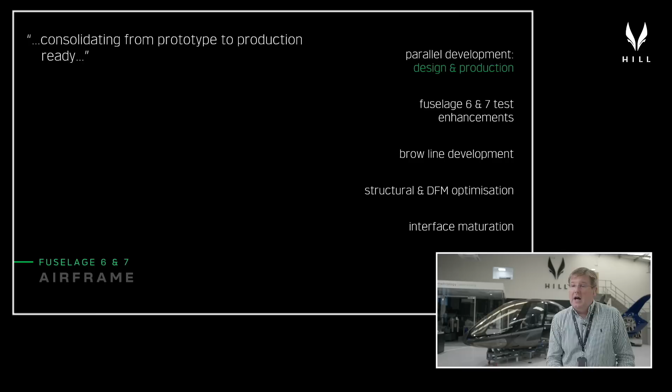Thanks, Ruben. Thanks, Misha, and welcome, ladies and gentlemen, back to DC1 for another packed update on where we are with the development of HX50. As usual, this evening, the presentation will take the form of a bit of a walk around where we are on the airframe. I'll update you on the engine and the drivetrain. We'll talk about the avionics. I'll add some more stuff on our electrical system development and our power electronics this evening, and we'll finish up with an update of what's going on around this factory here and where we are with our scale up to full-scale production. Let's start with the development of the airframe.

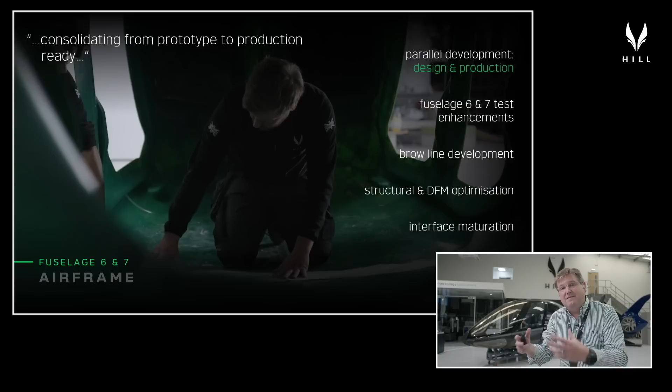So we're currently building fuselage 6 and fuselage 7. Now, one of the benefits of our vertically integrated strategy is that we're developing in parallel all of the production methods and processes at the same time as we're developing the design and the aircraft itself. And what that means is we get the opportunity to bake in a lot of the things that get fed back from production, fed back from tests that we carry out on early production specimens into the design before we freeze the production tooling. And that's exactly what we're doing with fuselage 6 and 7.

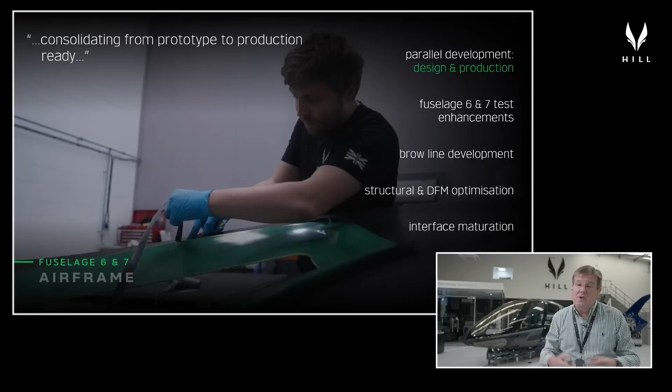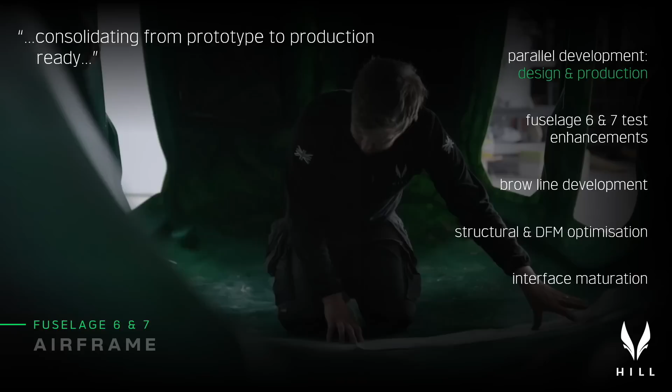So one of the major areas that we've enhanced with the fuselage is during the human factors testing, we noticed that we'd got a slight limitation in the upward view angle of the fuselage, and we were able to modify that. We've subsequently gone back, modified the tooling, and we're currently grafting in a modified brow line into the two fuselages that will follow. We're also being able to test out a range of modified production processes for the fuselage that reduce the amount of labor, increase the amount of parallel activities that we can do as we produce these fuselages by working on open tools as long as we possibly can before we bring the whole thing together to produce the structural monocoque that you've all got used to seeing.

There are some other areas that we're able to bake in as well. As you can imagine, the fuselage is the stickle brick that absolutely everything else attaches to in the aircraft. So as all of these other areas are maturing and their interfaces mature, we're able to capture that and bake that into the production tooling rather than having to compromise on things that were frozen in very early in the design process. So all of those things are going on right now. Fuselage 6 itself, the outer skin of that is now built.

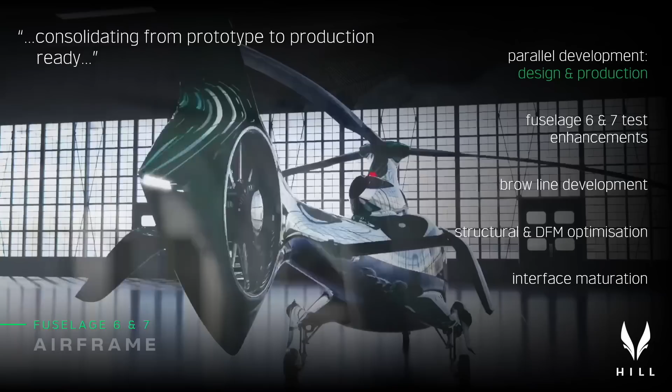All of the foam cores are wrapped, and over the course of the next week we expect to complete the primary shell for fuselage 6. Over the remainder of the month we'll be grafting in the new brow line and making a few modifications to how the undercarriage fits, ready to accept wheels on that one, and then number 7 will be set up for skids for the December event. Really pleased with how all of that's coming on.

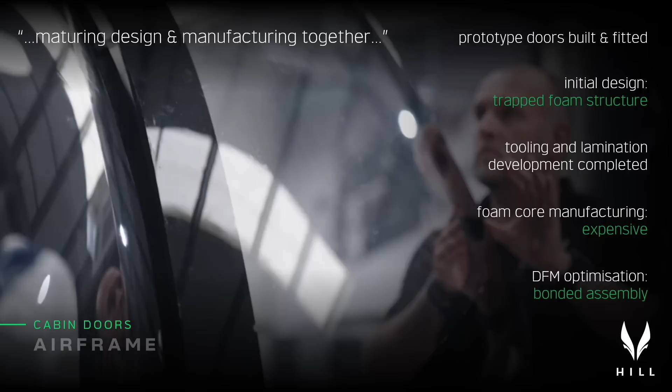Some of the other areas we've been working on are the development of the general fit and finish, so we've done an awful lot of work on the cabin doors. Doors are far more complicated than you might expect when trying to graft flush-fitting doors onto a fuselage that is essentially curved in every direction. Adjusting the doors on the job is much more complicated than the planar doors you get on road vehicles, and it's also an opportunity to take a look at how we initially designed the doors.

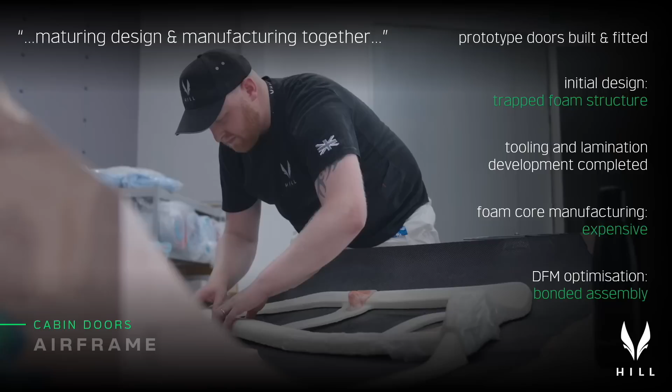They were initially designed as trapped foam core structures, and we're now looking at an A surface and a tooled B surface construction that allows us to trap a lot of the internal features within the door. This also allows us to work on both the A surface and the B surface in parallel in production, and both of those parts now get tooled surfaces, so it makes it much easier to produce doors to much tighter tolerances.

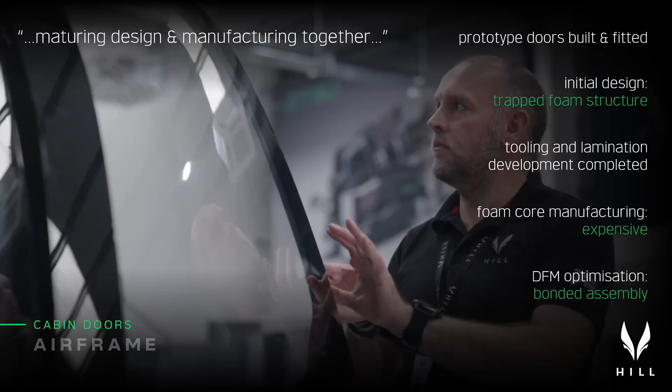That makes fitting it on the finished airframes a lot easier to do. All of the tooling approaches for the doors have now been tested, and the laminating processes have been developed and tested. We looked extensively at different ways of manufacturing the foam cores before deciding that a better way of doing the doors would be to tool both sides and do them in parts.

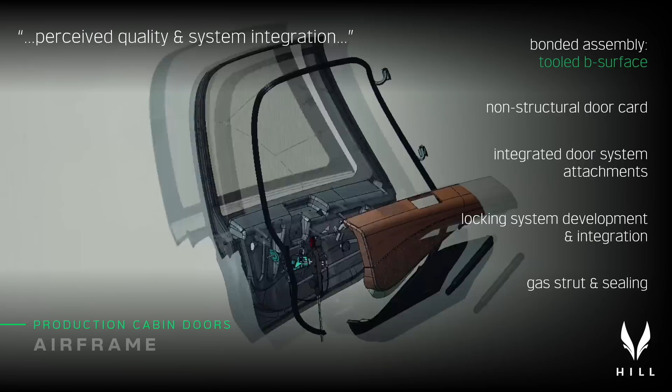All of that work has been going on over the course of the last month, and the guys are currently working on the final production scheme for the doors that allows us to have the tooled A surface, the tooled B surface, and the integration of a non-structural door card that allows us to provide that automotive fit and finish to the inside of the interior.

We're developing out the locking system that gives us our elegant flush fitting handles on both the door card and the outside of the door. We've done a variety of development activities on different sealing strategies for the airframe and for the doors, and we've also looked at packaging the gas struts so that we can hold the doors open.

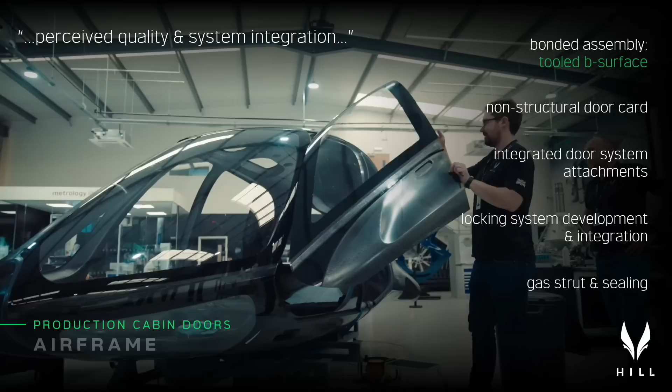When you look at the doors that I'll show you on the airframe shortly, one of the challenges on HX50 is that because the A pillar is tilted so far back, the door opens out and up, so it very much needs a gas spring to hold that big door securely open when you're using it. So all of those things are coming together very, very nicely.

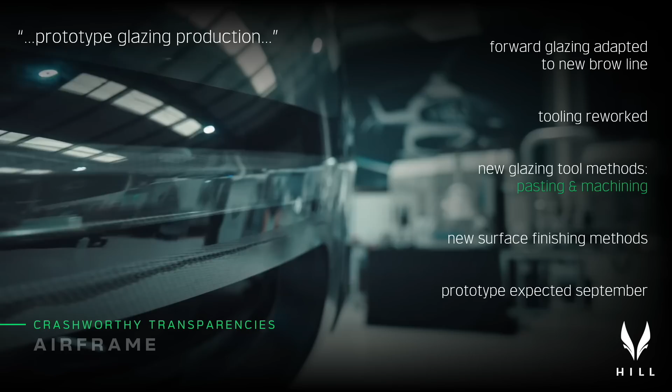With the modifications we've made to the brow line of the fuselage, that obviously passes on inferred modifications to the tooling we've developed to produce the glazing, certainly the upper glazing for the forward fuselage. I mentioned last month how the guys had been developing improved tooling strategies to produce optically perfect glazing in-house, both in acrylic and in polycarbonate, for the impact resistant windows on the front of the aircraft.

We're currently reworking those tools as we speak to accept the new brow line and to upgrade the surface finish across the full suite of glazing panels we've got on the aircraft. So all of those things have been going on during the course of the month.

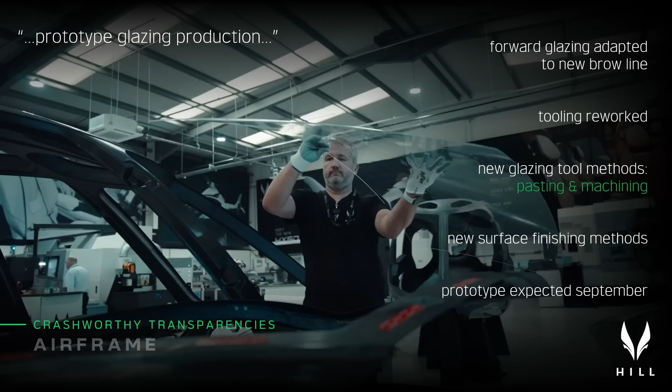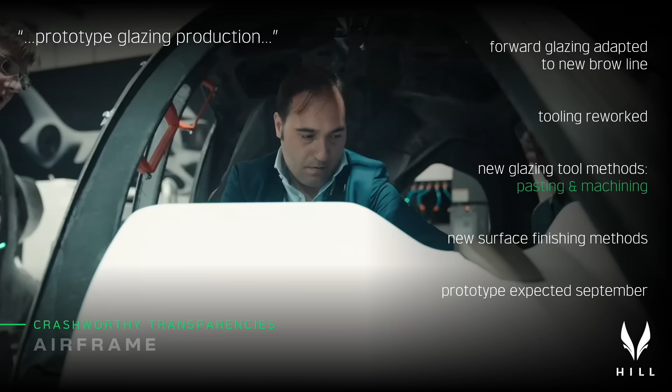The rework we're doing to the existing prototype tools simply involves using some of the same pasting technology we use for producing the big fuselage patterns to allow us to rework those, and then the latest surface preparation methods in terms of getting that ultra high gloss optical finish we need to deliver optically perfect windows. So all of those things have been progressing nicely over the course of the last month.

We've had a small interruption with the 5-axis machine having a small issue, but that's due to be resolved early next week, and then we should be back up and running with the next set of tools. We're hoping that if we get the full suite of tools completed by the early part of September, within September we should see the first full set of optically perfect glazing panels for HX50 that fit the new modified fuselage.

So really pleased with how that's been coming on. One of the key areas that we're trying to push forward in general aviation with HX50 is this idea that HX50 is essentially a flying supercar. It's an aerial grand tourer, and for that we need to deliver levels of perceived quality that traditionally have only been delivered in high-end automotive organizations.

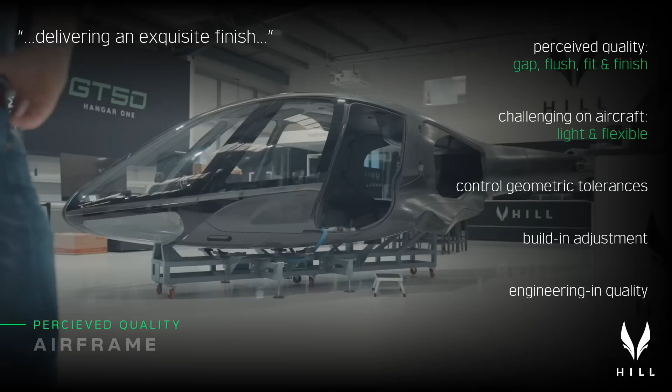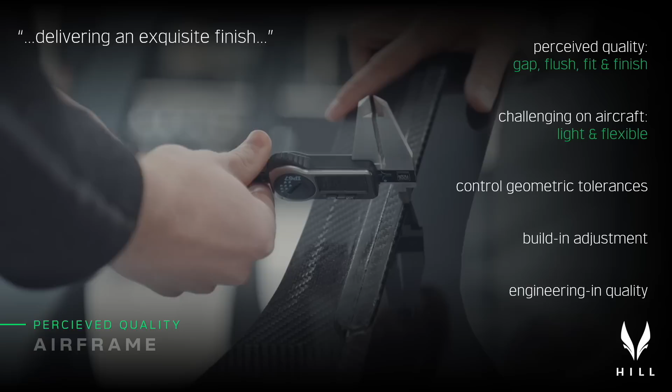Now, that's a very difficult thing to do in an aircraft, because fundamentally you're dealing with composite materials as your base structure, which are quite difficult to finish at the best of times. And then we're dealing with structures that have to be so light that they're inherently very flexible. So getting flexible doors to fit in a flexible fuselage and to maintain the kinds of gap and flush conditions that people have come to expect in premium cars is a very challenging activity.

So over the course of the last month, the guys have been working really hard to look at strategies that we can maximize the quality built into the airframe, ensure that the whole surface, the A surface, is delivered perfectly flush, perfectly streamlined, and that we have enough adjustability built into the airframe design that we're able to adjust doors to accommodate the inherent variation that you get in any series production part. So we're working very hard at the moment to engineer quality and perceived quality into the production processes to enable us to deliver these levels of production, perceived quality on every production unit.

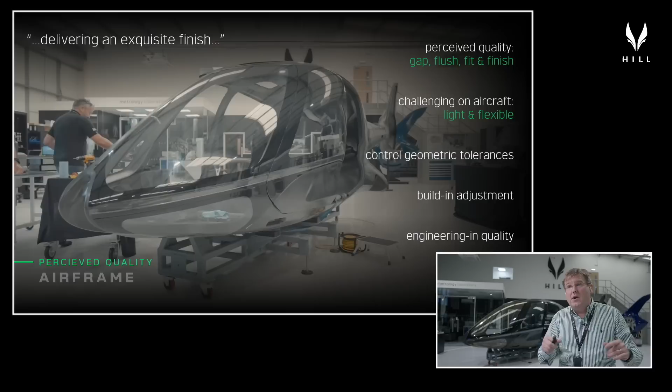So there's been a lot of work that might not be obvious as to why you need to do it, but there's lots of really important things going on in these early fuselages that we're baking into fuselage 6 and 7 to make sure that the production units live up to expectations when compared to modern premium cars and supercars. So let's go and have a look at the airframe behind me, and I'll show you some of the things that we've been up to.

So as you can imagine, I spend most of my life dealing with the minutiae of tiny little details, making hinges work, locks work, stress analysis work, getting production processes to work. And every once in a while, something happens out here on the shop floor, and it makes you realize, you know, we're getting there. This is really coming together.

And one of those moments was when we first got to put the first few glazed panels on, the first couple of doors on, and the physical property that we've got here on the shop floor really started to take shape. We've kind of got used to looking at it here on the shop floor now, but I think you'll all appreciate when you look at it, everything that we said we would deliver in terms of the images that we've provided, the look and feel and quality of the product is being delivered, even on these crude early production demonstrator prototypes that we're producing here.

So what we've got here then is the first prototype glazing installed, the first chin windows installed, and we've developed through the strategy for managing all of the panel gaps with the doors, all of the panel gaps with the glazing. We've talked in some of the previous updates about the need to have these blackout obscuration bands around the glazing, and those things are there purely because we bond the windows onto the carbon flanges, and so we need to obscure the adhesive behind there to protect the external aesthetic of the aircraft.

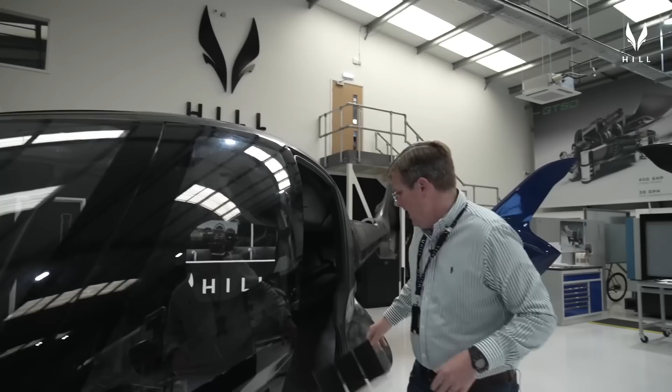So these preliminary bands we've just done with a hard edge, just because it's easy for us to do that manually. In production, we'll be adding the screen printing process that we showed you previously, and that adds this gradiated dot fade that you're used to seeing on your vehicles at home, just to ease from the harsh black into the transparent area of the screen. And again, it's these little sort of details that really add to the perception of quality that you deliver when you approach the aircraft.

One of the other challenges that we've been working with on the prototype aircraft is obviously the doors on aircraft are a lot shallower in section than they are on automotive vehicles, and when you have gaps between panels on cars, they usually back onto a huge shadow gap, so you can't see anything that's behind it. Because our structure sits right behind the doors, it's a much shallower section. We end up having to deal with all sorts of surface treatments and things in there just so that you can't see through to the nuts and bolts of the structure.

And it's little details like that that you have to get right to make sure when this is presented in full, it looks right. You'll also notice that we've got the groove underneath the glazing here that receives the chrome signature strip and also part of the signature lighting that goes with the aircraft. We've got the door handles for both external and internal, all in development at the moment. They're being produced as we speak.

The door itself, as I said, it opens slightly upwards because of the angle of the A-pillar, and so we have a gas spring installed from the root of the A-pillar up to the base of the door here, well out of the way of foot swing. Now, if you look at the interior of the door here, Milan, what you can see is this early prototype door was based on the original trapped foam construction. So we tool the outside, we put a foam core in, and we lay carbon fiber over the inside.

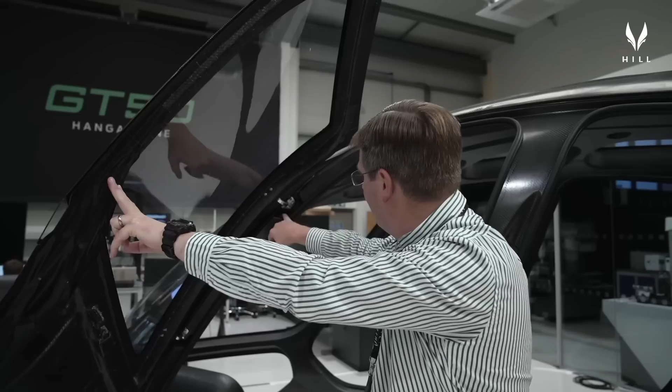The challenge with this construction, when you then want to trim the inside of the door, is this isn't an accurate surface. This isn't a tooled surface. So we then have all sorts of difficulty in accurately registering the trim panels that need to fit really accurately. And so the move to a tooled B surface on the back of the door makes all of that much, much easier. So those of you that have been looking at the airframe over the course of the last few months might have wondered what these recesses and pockets were. They're there to receive the pantographic hinges that allow us to clear the curvature of the aircraft as we open the doors.

And then, as you can see, we've been playing all sorts of tunes on the sealing strategy around the door here, just to get the sealing right, the door to sit right, and the whole door as a system to work properly. So all of that's coming on very nicely. We're really pleased with how that's coming together.

One of the other things that we're doing is we've been modifying the brow line. So one of the areas that we identified from the human factors trials is that the aircraft would benefit from rolling this brow line a little bit further up the windscreen. And so we've subsequently developed a design modification for that, tooled it, and then we've produced the first of the insert carbon panels here that will be substituted into fuselage 6 and 7 to prove this out. And all of the glazing's been adapted for that.

So we've tooled it and produced the new brow line over the course of the last month as well, so that we can get that into the aircraft. So really pleased to see how this is all coming together. I'll show you in a minute how the rest of the doors are coming together. We've tooled all of the doors now, the A surface for all of the doors. We're doing the final development on the B surface, and then the rest of those can be produced and we can get those onto the prototype and get those things moving as well. So really pleased with how that's coming together.

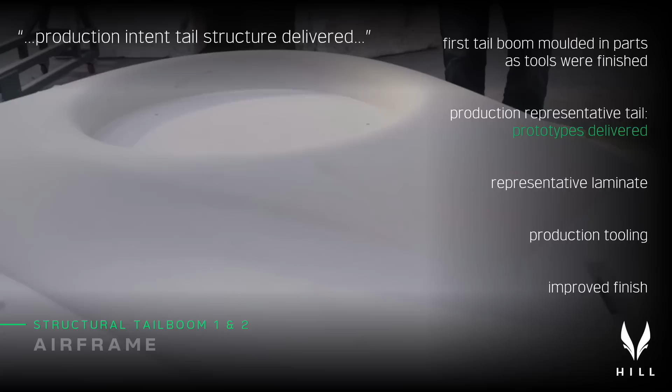So in addition to the monocoque, the main structural part of the fuselage, we talked last month about how we tooled for the first time the tail boom. Now, the first tail boom, in fact the tail boom that sat on the back of the airframe there, was actually made in parts. So as each of the tools from the suite of tools that make the tail boom were produced, we made the part, bonded it together, and that gave us the first tail boom to demonstrate. Subsequently, now we've got a full set of tools, we've been able to go back and produce a structurally representative and manufacturing intent representative tail boom.

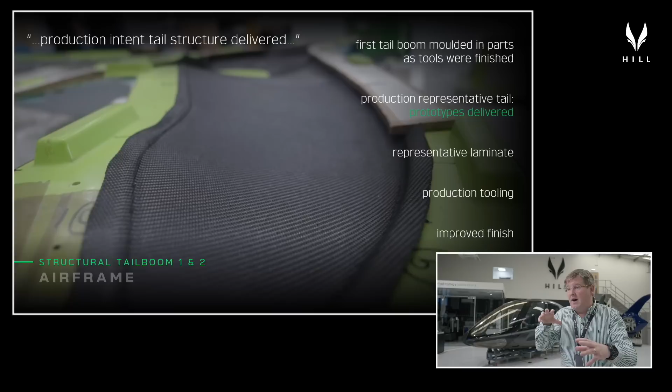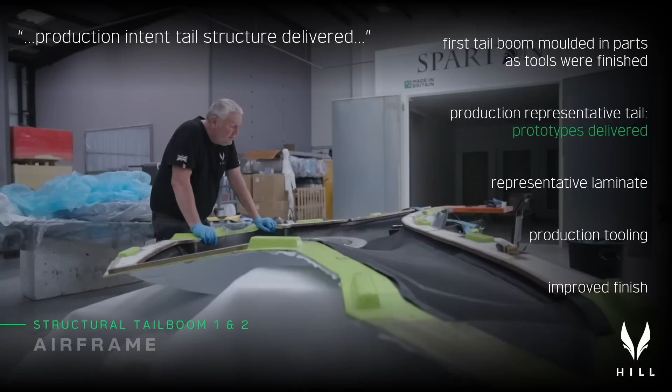And this includes the design intent in terms of the structural design of it. It includes all of the processing details for how we wanted to make it. It includes a representative laminate, so the correct carbon plies on the inside and outside, the correct core material to give the boom itself its strength, its integrity, its toughness, and all of the production tooling. And then on top of that, with having a full set of finished production tools for that, we've also got a greatly improved surface finish on that makes it a lot easier to paint. So let's go and have a look at the first of the production intent tail booms.

So this is the first structurally representative HX50 tail boom. You'll notice that the surface finish is significantly better on this. So the tooling that we use for this is greatly improved over what we used for the monocoque. The processing parameters for curing these are also now significantly refined and getting very close to production intent.

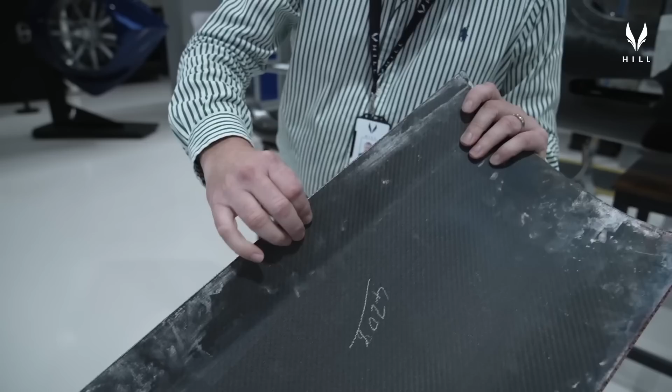And the laminate in there is actually the laminate that we showed you last month, where we've got plies of carbon on the outside, the honeycomb core in the center, and then plies on the interior. And the beauty of all of this is that we get a vast structure capable of taking the large diameter ducted fan, but the thing is incredibly light. So you can actually pick this up with just one hand.

So the whole thing currently sits at just under about 15 kilos. And this has still got some structural optimization to go through as well. So it's a very, very large, stiff, but incredibly light structure. So really pleased with how that's come. We've actually built both of those now. So the 2 structural tail booms that we need for the 2 prototypes for December, well, one's here, the other one's down in DC2. So really pleased with how the guys have done with that.

The 2 other points just to mention before we go back, we've tooled and completed the covers for the tail rotor drive shaft zone. So on the top of the tail boom, I don't know if you can show it, Milan, we've got an extension of what we call the transmission deck. So this is a flat deck that runs across the entire spine of the helicopter that mounts the engine and then all of the drivetrain components.

And so the tail rotor drive shaft sits in pillow block bearings on here into the tail boom there, and then we've got a snubber at the back here just to deal with the rotor dynamics before it pops out in the duct to drive the tail rotor. So those additional parts have been completed. The covering plates for the snubber covers have also been completed and built, and we're now moving on to the horizontal stabilizer to get that tooled and built on there as well. So great progress in terms of the tail boom.

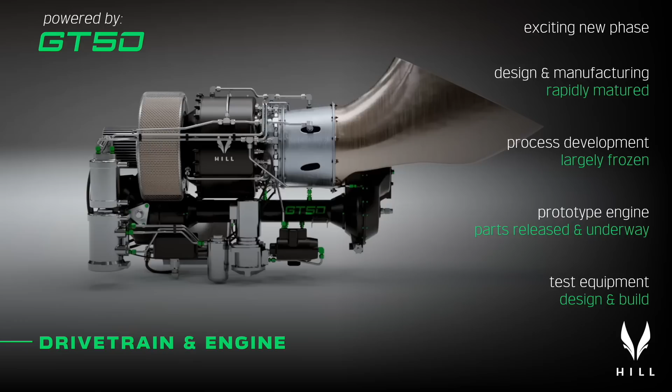So let's talk about the GT50 engine. So we've very much entered an exciting new phase with the GT50 over the course of the last month. You've been watching us do seemingly endless amounts of design optimization in terms of the secondary air system, in terms of the core design of the gas generator and the key rotating parts of the engine. And this has now reached a nice level of maturity where we can literally push all of these things down into manufacture.

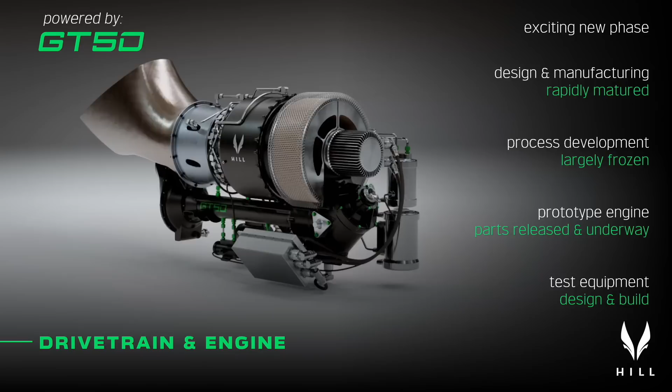So with all of the manufacturing processes having been developed in parallel with that design exercise, we're now in a position where the actual parts that are being produced for the actual test engine are underway now. And every few days or so, there's another trickle of parts from downstairs down to Mark. And the guys are on a massive push now to get the gas generator for the engine built. They've been on with the engine drivetrain for some time now, and that's all coming together really, really nicely.

In addition to the actual prototype build of the engine components, we're also now having to play catch up with the build of a lot of the equipment we need to test the engine, because you can't just have an engine sat there on a tabletop. We need the test equipment to be able to produce that too. So I'll show you shortly what we're doing with some of the test equipment for the first part of the engine that will be tested, the combustor, and I'll also show you later the electrical test bench for the motor generator unit as well.

So one of the areas that has been a particular success over the course of the last month has been the development of our turbine blade casting processes. And I can't overstate how important this is to us, because this is an area that's kind of make or break in terms of the viability of delivering a cost-effective turbine engine. So this has been something that we've been working on in the background throughout the entire development program. It was one of the first things I did over a decade ago in proving that we could produce a cost-effective gas turbine engine, and these processes now are all starting to come to fruition.

So as we introduced last week, we've got a very novel process for casting these turbine blades, which require an oxygen-free environment, using equipment that doesn't have the same capital cost as the stuff that's been traditionally used by the traditional manufacturers. We've then gone on to cast the first test specimens of the GT50 gas generator turbine blades and also the power turbine blades to the latest designs as well.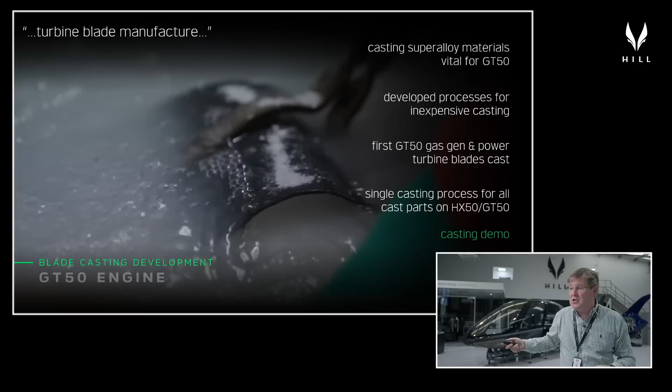And what we've done over the course of the last month is not do one iteration, but 3 iterations of that process development to get to a point where we're now making good quality castings that are suitable for testing. So I'll give you a little bit of a demonstration about that just now, but this is crucial to the development of how we make the GT50 engine.

So the objective in all of this is essentially to end up with individual turbine blades cast out of ultra high temperature superalloy material. Now this material is really, really awful stuff to cast. You can't cast it in air or oxygen because it reacts and destroys the crystal structure, so you have to put it in an oxygen deprived environment, typically a vacuum. So we've been developing processes, they're conventional investment casting processes, but processes that eliminate the need for the expensive infrastructure to do that.

Now, to do that, and to do that rapidly, what you try to do first is essentially cast the blank. So this is essentially the blade that you want to finish up with the fir tree detail in. You don't cast the fir tree detail in, that gets ground in. So we need to cast the blank. So this has just got the stock material on there to be able to produce the fir tree root to hold the blade in the disc.

Now, in order to expedite that, we started by using a special rapid prototype material that's designed to burn out of the investment shell, the ceramic shell that we use to cast these things in a furnace. Now, we did that in good faith, and largely because the timescales for getting rapid prototype wax investments were just too long for us to do this quickly. So we tried it with rapid prototype polymers first, and what we found is they didn't burn out of the investment casing well enough.

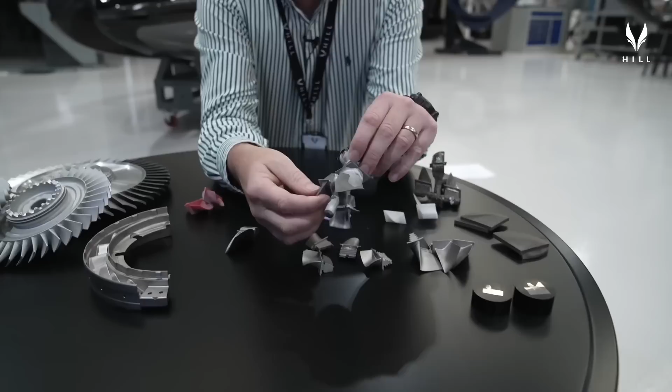So with that now under our belt, we then went on to take delivery of the proper investment waxes, and all of these earlier attempts were just to get things done quickly while we were waiting for the correct materials to come in, which were on a longer lead time. So we've now had a whole batch of these waxes delivered, so we've got several boxes of this stuff to make all the blades we need for the test engines. And what you can see here is that we are now making really, really nice castings. So great surface quality. We're burning the stuff out of the investment really nicely.

As soon as we've finished the update for you guys tonight, these things are going off to be chopped up, put under an electron microscope, have all the chemical analysis done on them, have them x-rayed, make sure they're void and defect free. Once we know that's the case, we'll be purchasing this equipment so we can do these in-house, but we'll also be producing the full batch of turbine blades to produce the test turbine rotors. The blades we'll show you later that are currently on the manufacturing build of the engine are rapid prototype ones, so we can't test those.

So all of those processes are coming together really nicely. We've shown you previously that we've developed the processes to create the defect-free fir tree roots. The only other missing element is developing the processes to take delivery of bar stock of the superalloy material and part it down into precisely weighed measures so we've got just enough material in each batch to fill these trees. All of that stuff's been developed and it's coming together really, really nicely. As soon as we get the results back for these turbine blades, we'll be able to make the full batch of blades for the test engine. So really excited with that.

Once we've done the rotating components, the very next step is to start looking at the stator rings - these are the nozzle guide vanes, and this is our current first stage cooled nozzle guide vane. This is the part of the engine that comes first after the combustor. It sees the highest temperatures in the engine, so being able to provide these cooling passages through the blade and out the trailing edge is vital.

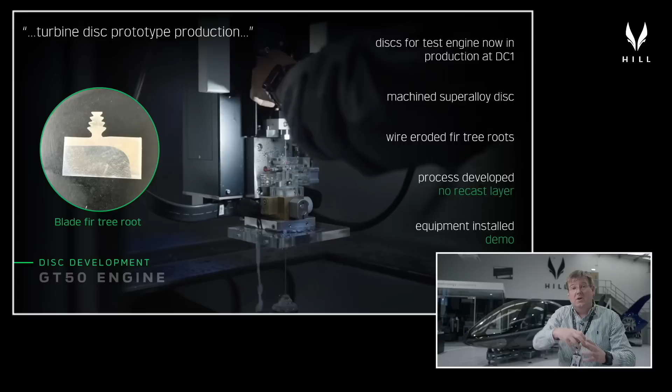In addition to the turbine blades themselves, the blades reside in a superalloy machined disc. What we've been showing you over the last couple of months is the process development we've been doing to machine the turbine disc and then cut in the roots of the fir trees that the blades slot into, which withstand the enormous centrifugal loads the engine sees when spinning at 46 to 50,000 RPM at extremely high temperatures. Over the last month or so, the guys have actually been producing the very first turbine disc out of superalloy material for the first test engine.

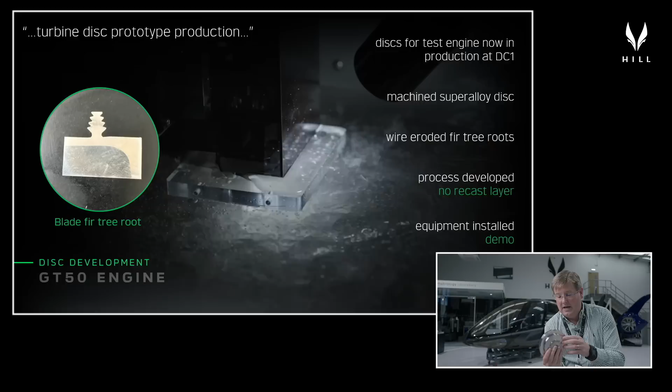This might not look like much at the moment because it's only part machined, but the guys have essentially finished the parts of the disc that have to receive the fir tree. What I'll show you shortly is we've subsequently purchased the wire eroding machine to produce these fir tree roots, as you can see on the slide on screen. So let's go over to the machine and I'll show you how we produce these roots.

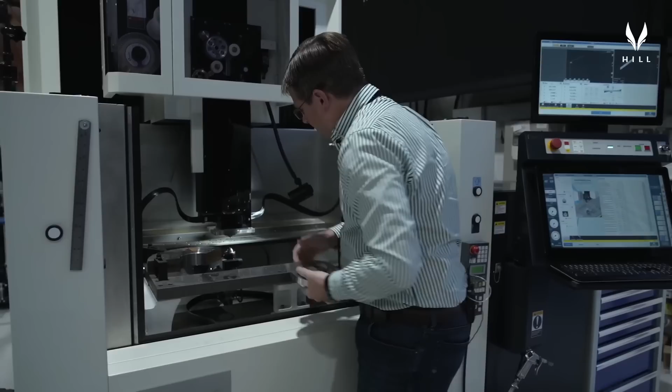Over the last month or so, we've demonstrated using a partner's facilities that when we put the disc within the machine, we can use wire erosion to go in and cut out the profile of the fir tree roots as a replacement process for traditional broaching. This allows us to produce far more accurate fir tree geometry than was previously possible, and it allows us to do it with very minimal capital expenditure.

The only challenge was there's an element of process development necessary to ensure that as you spark erode this material away, you don't leave a layer of brittle recast material that would compromise the properties of the disc. We've done that development, we've qualified that process from an engineering point of view internally, and we're just waiting for the guys to get back off holiday over the next week, then we'll be producing the fir trees in the first gas generator disc. This is the part that will run in the first GT50 engine with our first set of in-house cast turbine blades. Really pleased to see this come together over the next couple of weeks or so.

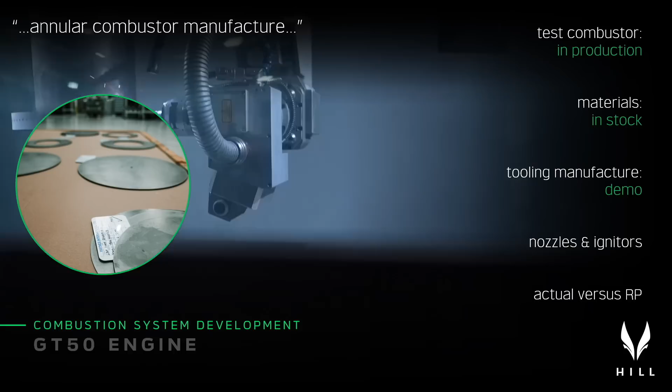So in addition to the compressor, the turbine disc, and the turbine blades, I made you aware over the last couple of months that we've also released the combustor. The combustor is a really complicated fabricated structure that sits in the heart of the engine and does the primary mixing of fuel and compressed air to generate the hot gases that the rest of the engine runs on. We've explained previously how this is a series of processes where we buy flat sheet material, roll this into cylinders, expand that to hold the dimensions and cross-sectional profile, and then use a sophisticated 5-axis laser welding, laser drilling process to put all of those pieces together.

All of those things are going on at the moment, and we've got the test combustor in production. All of the materials for the remaining parts of the combustor fabrication arrived last week, and they've subsequently gone out to a supplier that's doing some of the prototype pressing and spinning operations for us, so we can get the whole thing done a bit faster. All of those materials are in stock, and what we're doing now is making the tooling to enable us to do the expanding.

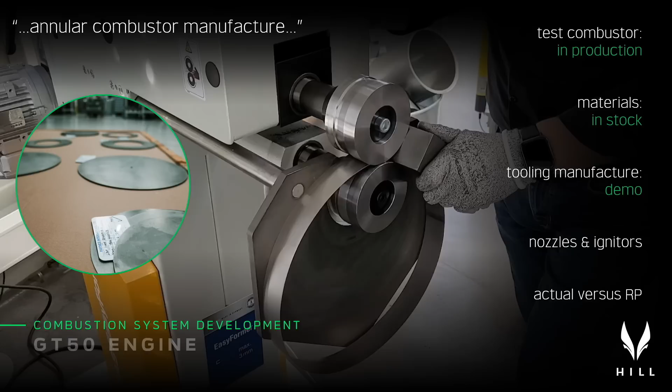So again, if we just pop over to the forming machines we've got over here. I've demonstrated previously how we roll the profiles between two rollers with the required form on them. That then gives us rings with a little step in them that will slot together to make the combustor. The idea after that is they pop onto this machine here, you pull the pin down, and we make these tools here that have got the profile that you want. The same profile you can see in that disc is present in that tool. As that is pulled downwards, it stretches this pie slice out and makes the ring perfectly round and to a perfect diameter.

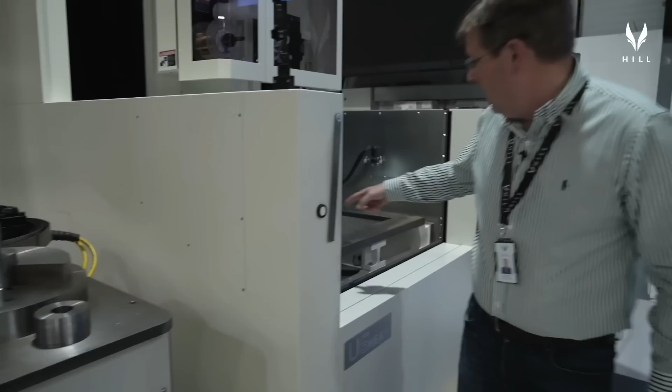This material for the tooling arrived last week, and what they've currently done, you can see they've made one element of the pie slice tool there, and we've got the next few sections here on the wire eroding, and that one's just about to be parted off. They cut that just before we went on air. That one's got the profile on the outside, and we've just got to go around and make the rest of those. Then we're in a position to make all of the rolled rings that make the outer and inner annulus of the annular combustor. They'll then be combined with the pressed and spun components, and then we can fabricate it and we're ready to go.

So with all of this, there's one other thing that we've done on the combustor that I must tell you about.

One of the things we'll be doing on the prototype combustor, to avoid waiting for a very expensive production machine, is actually drilling the 2,500 precision holes in the combustor needed to mix the air and fuel directly on the 5-axis. Just before he went on holiday, Mark did some trials on the super alloy material we use to produce the combustor, to demonstrate that we can drill these holes in a reasonable time scale using conventional methods rather than needing the laser drilling for the combustor. So we've proven that out. As soon as those things are rolled, we can assemble it and produce the first combustor.

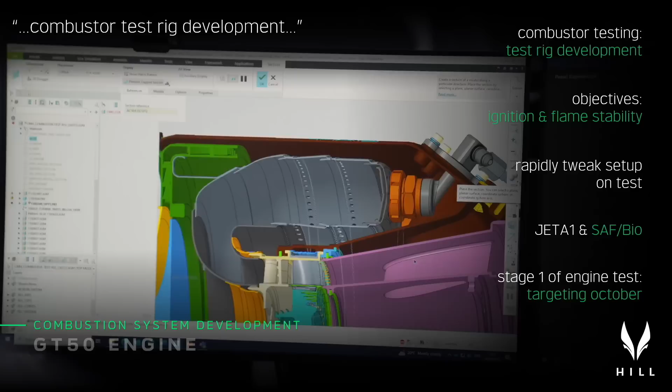So with that coming together, we obviously have to put the facilities together to test it. The two first tests we want to do on the GT50 engine: the first one is the starter generator unit, involving both the power electronics side and the mechanical side - I'll talk about that later. The next test is the first part of the gas generator, the combustor, making sure we can get it to ignite and maintain stable combustion before we put that into the engine, because dismantling and reassembling a whole turbine engine to tweak combustor parameters isn't a terribly efficient way of working.

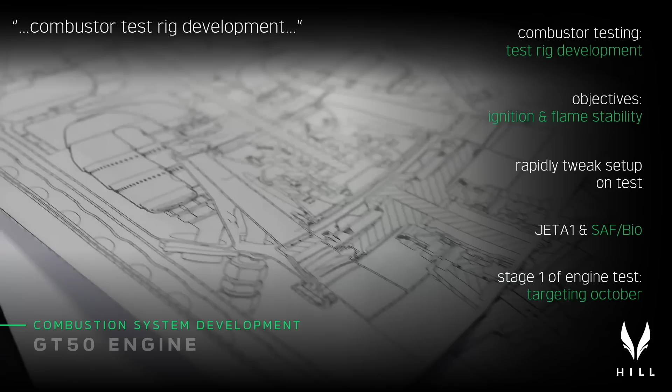So what you can see on the slide there is we've developed a simplified combustion test rig that allows us to combine as many of the core engine components as possible from the combustion system with some simple add-on parts. This allows us to run the combustor on a bench, prove we can ignite it, and prove we can maintain stable combustion before we embed that deep in the heart of the engine and go on to run the full gas generator.

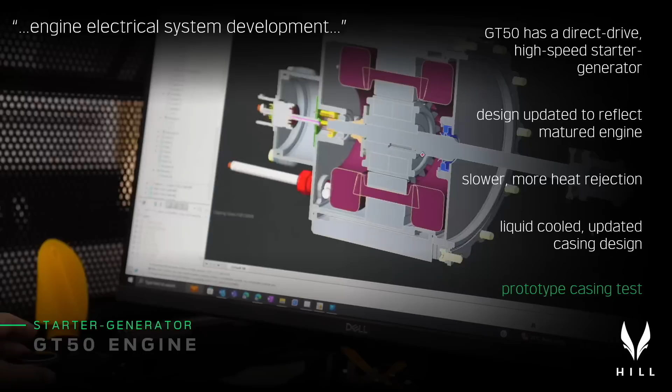That rig is just finishing off being designed at the moment, and as the boys return from holiday over the next week or two, we'll be putting that through the production facility here at DC1 to get that built at the same time as the combustor. Providing all of these things stick to the schedule we're working to, we're targeting a first run of the combustion system for GT50 in October, followed rapidly by the full gas generator unit. Really pleased with the progress made by the engine team and how that's coming together.

One of the areas we don't talk a lot about is the electrical system, largely because I'm not much of an electrical engineer. But we've got a very strong electrical engineering and electronics team here now, and they've been developing the starter generator, which includes both the mechanical hardware and the power management unit, as well as all the control algorithms, studiously as the engine has matured.

The basic configuration for the starter generator was determined and designed a long time ago, but as the engine matures, its exact idle speed, flight idle speed, and operating parameters mature with it. So one of the things we've been doing over the last month is tuning the design of the starter generator to produce its power at ever so slightly lower speeds, meaning slightly lower voltages and slightly higher currents, adapting it to how the engine wants to run now that we have the full detail of the engine available.

One of the features we've had to update is that at slower speeds the starter gen needs to reject a bit more heat, so we've switched from air cooling to liquid cooling. That keeps the overall device nice and small, but it means the casing for the starter generator had to change - and I've got a rapid prototype version of that here. This is to test the cooling passages embedded within the casing, the manifold areas at either end, and ultimately the heat rejection capability.

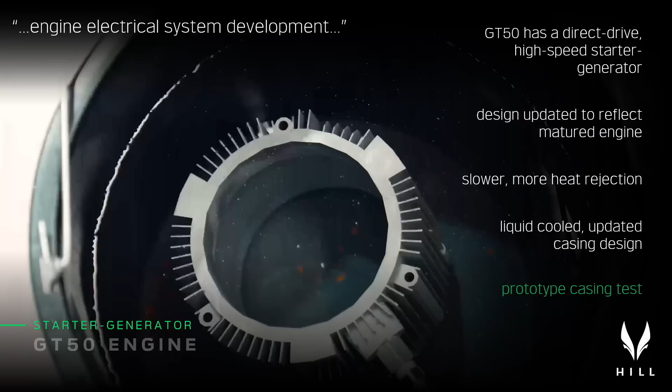We've subsequently pressure tested that over the last month, just to prove the integrity of the pressure vessel within it also works. So we're happy that we've got a liquid-cooled starter gen that works really nicely. We've now got all the information we need to carry this forward and finalize the electrical optimization based on what we now know about the engine, and it's all coming together really nicely and really quickly. Towards the end of October, we should be in a position to test the starter generator over in the electrical test cell. Really pleased with how that's coming together.

Let's go and have a look at how the manufacturing demonstrator is going for the whole GT50 engine.

The thing you've got to remember - a lot is made of the fact that we're developing our own gas turbine engine. But the clever bits, the compressor, the turbine blades, the fancy castings, are only one part of it. Our real task here is developing an engineered product - something that has to be made, and made to a price, to make general aviation healthy again. So a lot of the work we do in parallel with the really clever stuff the guys upstairs do designing the turbine blades, compressors, secondary air systems, and fancy FADEC systems, is making sure we've developed all the manufacturing processes properly, and we're not just baking in designs that are plain hard to make. So all the way through this development process, we've been developing the manufacturing processes in parallel with the actual engine technology itself.

What you can see here in front of me now is essentially a slightly earlier version of the engine drivetrain - but we've got a full engine drivetrain, including the power takeoff from the power turbine, the speed reduction gearbox, and the lay shaft that's essentially part of your tail rotor drive shaft.

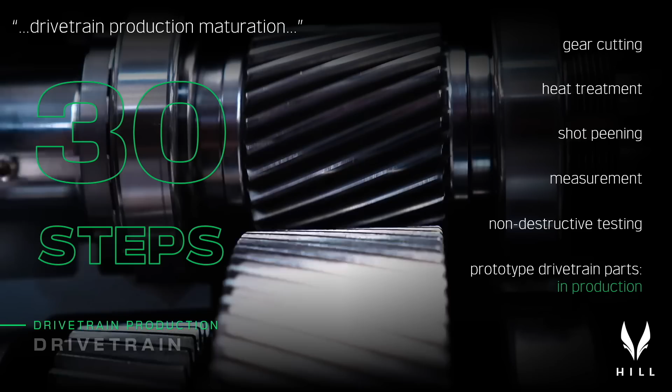So we're now in a position where we're producing the first 3 drivetrains, and the final of those will be the test drivetrain and the first flight drivetrain. I'll show you when we do the production walk around the sheer volume of components that we've now got lying around the facility that are going into those gearboxes.

So in summary, we've now mastered the gear cutting processes. We've got the heat treatment processes under control to our specifications. We're just doing the shot peening development processes at the moment. We've developed all of the measuring and the quality control, and we've just put the first batch of gears through the final non-destructive testing elements of our process flow to deliver flight-worthy gears.

And so all of that has come together to enable us to get the full HX50 and GT50 drivetrain into production in our own facilities. So really pleased with how all of that's coming together. And like I say, I'll show you a little bit more about what that actually looks like on the ground as we do the walk around in a little while.

Another area that we've been developing over the course of the last month or two is the Sprag clutch, and also where the Sprag clutch sits in the whole drivetrain. So we did a design for maintenance review a little while ago, and we reported that the feedback was we needed to move the Sprag clutch from the front half of the engine drivetrain to right at the back, just where the tail rotor drive picks up.

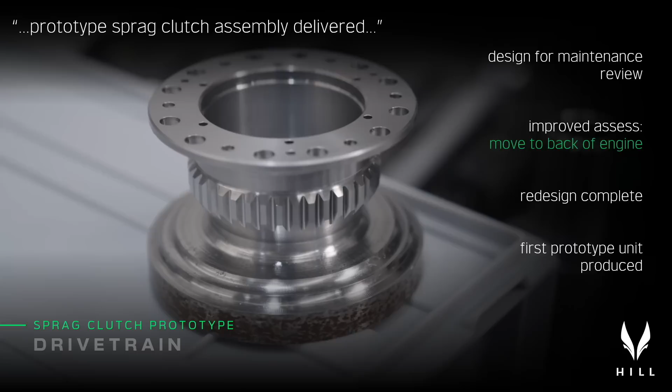That work has been completed, and we've also now produced the very first demonstrator Sprag clutch as well, so the housing, all of the interfaces that go into the drivetrain, ready for the machines for the end of the year.

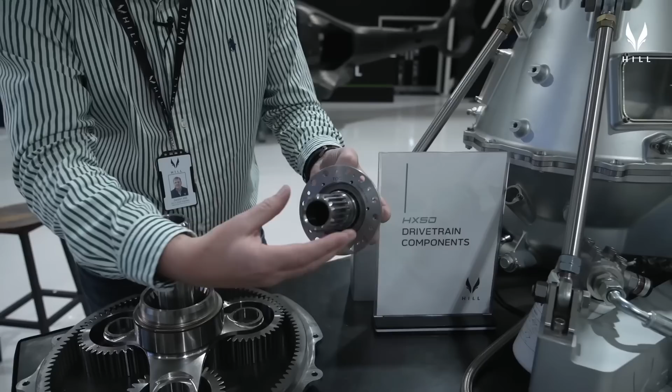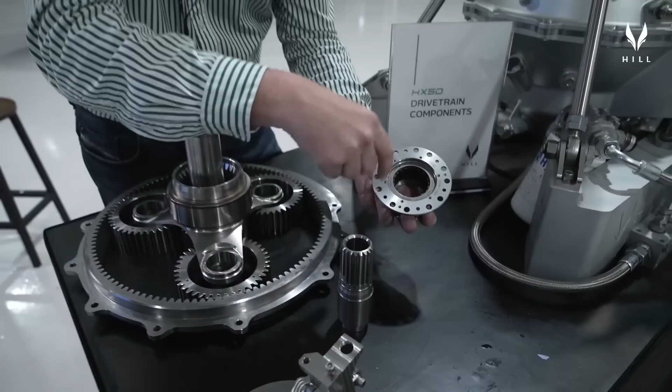So if we pop over here for a second, what you can see is the very first HX50 sprag clutch assembly. This is the outer housing that plugs into our gearbox, this is the drive shaft that plugs into the gearbox, and this is the output housing. As you can see, the shaft is free to run in one direction and locks solid in the other, due to the sprag clutch assembly that sits in the middle. These are a bunch of tapered rollers that, when you roll it one way, move closer to the center, and when you roll it the other way, increase the diameter to allow the thing to roll freely. Really pleased with how that's come together.

Similarly, you've seen our rotor brake assembly previously. This was always mounted on the input drive shaft to the main rotor transmission, and part of the design feedback loop we've been through is that we need to move this assembly further away from the input to the main rotor gearbox, purely to avoid the heat generated in the brake disc from cooking the oil seals on the inlet to the main rotor gearbox. We haven't finished the move yet, but we're currently moving this, and it will sit right next to the sprag clutch at the back of the engine, right next to where the tail rotor drive picks up. Pleased with how that's coming along also.

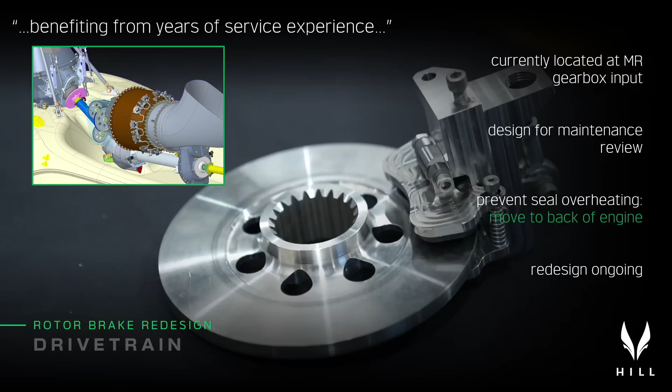As you can see in the little figure at the top, it shows the current location of the rotor brake, very conventionally tucked up at the input to the main rotor gearbox. As that brake heats up when you slow your main rotor down, it can damage the seals, so the plan is to drop that down to the heat-insulated area at the back of the engine speed reduction gearbox. That work's currently ongoing, and we should be able to report an update on that next month.

One of the areas we get a lot of questions about is the main rotor system for HX50. In terms of the aerodynamic design, the blade design has been stable for a very long time, say two years or so. The main rotor hub itself is central to the performance and handling qualities of the aircraft, and we've been through a range of iterations of this in order to get the right balance between a compact and aerodynamic design, but using conventional, low-risk mechanical elements. We don't need to be at the forefront of technology for the main rotor system; what we need is absolute reliability and benign handling qualities. So our rotor system is very much a greatest hits album of all the things that have been shown to work really well over the decades gone by.

We use composite flexures that handle your flapping and feathering movement, a cuff arrangement as you will have seen on a number of previous helicopters, and elastomeric lag dampers. There are a couple of clever details with the rotor head that we won't declare until later in the program. The way we do our lag damping is quite intelligent, and the way we fair this whole arrangement into the aerodynamic fairing of the aircraft is also very clever. So I've left those features out for now.

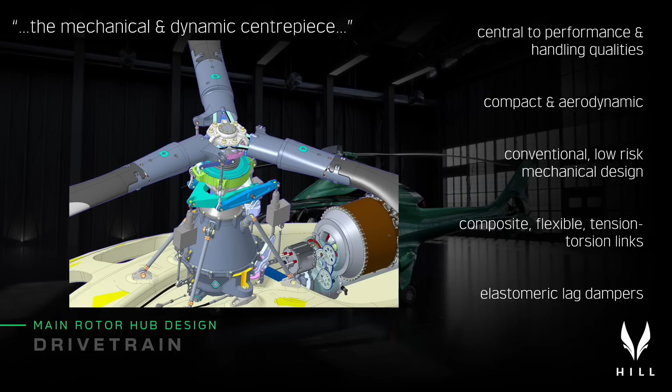There's a bunch of work going on at the moment to optimize the structural dynamics of the blades, and then they too will be released for tooling. So one of the other areas I'll update you on next is the Digital Cockpit.

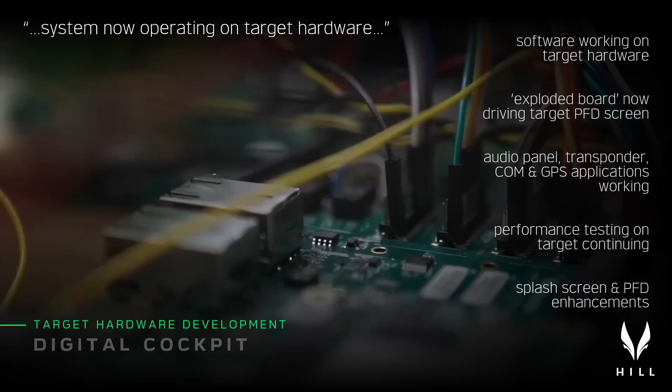So as I mentioned previously, we've now got the system operating on target hardware. And we showed you the exploded board of the target hardware that allows us to integrate these various components last month. Since then, we've managed to get the target hardware driving the target screen via the correct communications protocol. So we've now got the PFD screen running on the actual target screen with the actual target hardware, and the

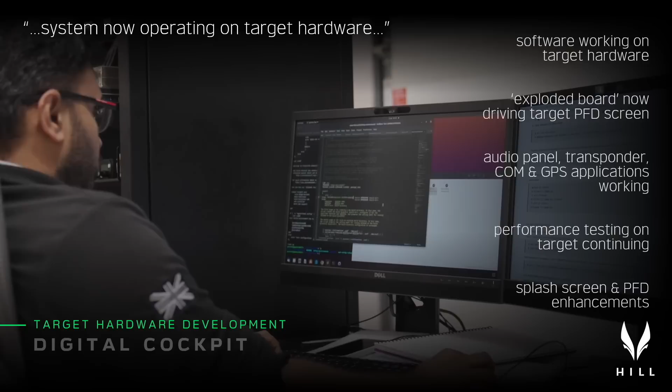guys are going through and integrating the audio panel, the transponder, the comm, the GPS. All of those applications are working off target and are now being ported to target to get the whole system singing together. The performance testing that we introduced last month is also ongoing, but one of the interesting things that the guys have done over the course of this month from a customer perspective is they're starting to look at now some of the other splash screens and some of the other graphical details that will be presented during startup and during the various phases of the operation of the Digital Cockpit.

So one new area of the UI development that's received a lot of attention over the course of this month is the user interface and the user experience for the IPI, the little center touchscreen in the center of the armrest that controls all of the things that you need to input into your helicopter. So the original concept for this looked quite nice, but the menu structure was a little bit clunky. Every time you went into something, you then had to do what you want and then back out of a menu layer.

And so one of the things that the guys have been investigating over the course of the last month is whether they can reduce all of that down to a simplified menu structure with a single home screen, where all of the things that you need to get to are just presented cleanly and elegantly. And what you can see on the screen there is some work in progress of how they're developing that. So you've still got your audio panel controls at the top, you've got a palette of comm menus to put your frequencies in and your radio controls, and then you've got your barometrics and your autopilot controls and your transponder all permanently resident on the home page.

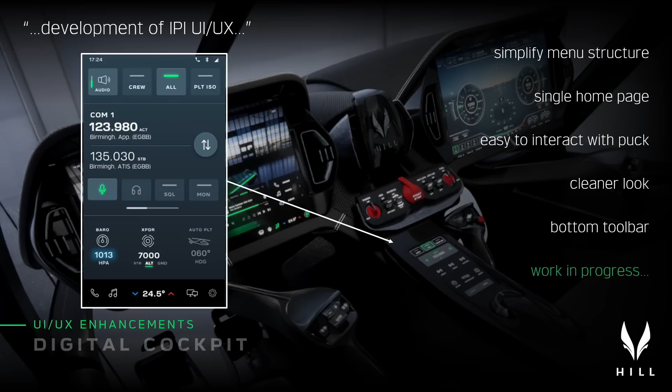So it's just one touch to then get to an area where the puck can control all of that for you. So really pleased with how that's coming on. There'll be a lot more on that and a lot more on the MFD as we go from here towards the full unveil at Christmas.

In addition to the software development and the user interface development, we're obviously having to focus now on the development of the physical aspects of the instrument console, both in the main console and in the roof console as well. So two of the areas that we've been focusing on has been the start panel, so the backlit switch deck that controls all of your startup controls, your fuel controls, your master battery and all of those things, how you do the backlighting, how you package the high integrity switch gear that we need, and how we dress that so it sits in the console as we need it.

We've also been doing some packaging exercises for the PCBs and the switches, and getting the perceived quality elements right for the stick head. So the image that you can see on the bottom of the screen there is the stick head that sits in the cyclic and the collective. That one's the cyclic one that packages the springs and the switches and all the other good stuff that makes all that functionality work properly.

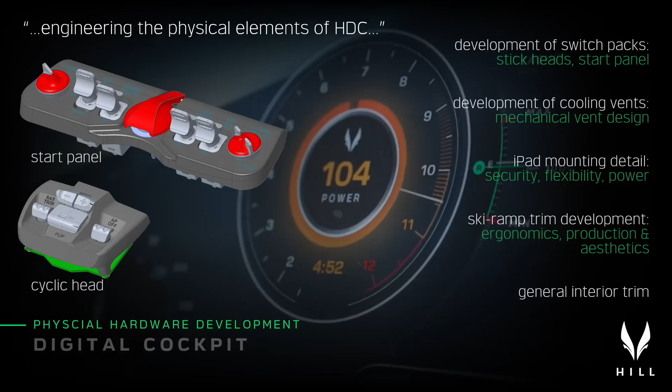We're also now starting to get serious about how exactly we want the iPad mounting to work in the center of the panel, and we've also been doing some practical work on how we develop the finishes that we want on certain trim parts of the panel.

So if we just pop over to the Digital Cockpit for a second, then you'll all be familiar with the IPI interface here. So the screens, everything that you need to do is on the IPI. We've always given people the option to type transponder codes and frequencies in using a touchpad, but the idea was always that you could use the puck to control that.

Now, one of the areas that we had to be really careful about was that when you're flying and your arm's on the armrest and the collective's coming up and down, we didn't want your hand to be inadvertently interacting with the puck.

So part of the design was to create a little guard for the puck. And one of the things that we've been prototyping over the course of the last week is one of the trim options, and the first of the surfaces that we're going to integrate the puck into the cockpit with. So there's two purposes for this.

It's to test the sort of ergonomic aspects of using the puck, and one of the things that all the guys have picked up actually is that it's still a little bit restrictive, so we need to just tweak this profile a little bit. But the other thing is looking at some of the ways that we can generate the piano black finish that the original design of the Digital Cockpit used. So how we can produce this in a way that's going to stand up to 50 years of service.

So we've been doing some trials on direct machined acrylic for that purpose. Obviously it would be injection molded or molded in practice, but in terms of the early ones we can machine those, and those trials have come out very well. We do get a lot of feedback that not everybody likes piano black. Trim, color schemes, palettes of materials are very much subjective and very dependent on your experience in life, where you're from in the world, and so there will be a range of options for these sorts of things.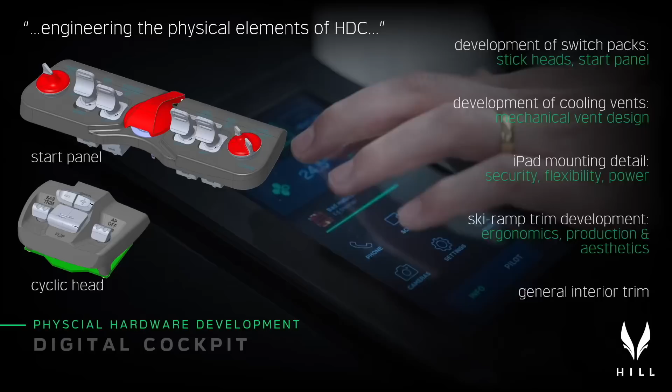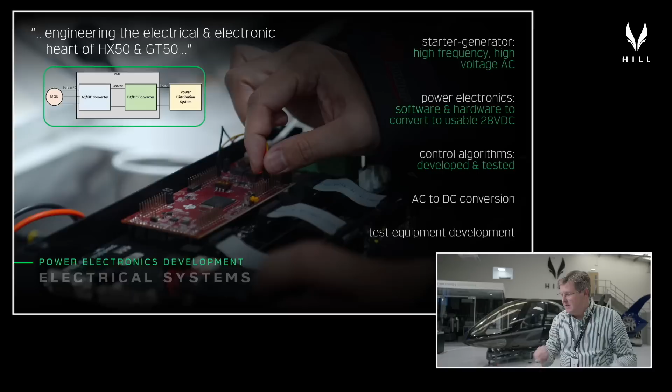Okay, so let's talk about engineering the electrical and electronic elements of HX50 and GT50. So as I mentioned, one of the novel aspects of the GT50 engine is the fact that we use a direct drive starter generator. So our starter generator spins at the same speed as the gas generator rotor, so 46,000 RPM nominally. Now at that speed we generate very high voltage, very high frequency AC. Okay, and the aircraft runs on 28 volts DC.

So what we've got to do is develop the power electronics to convert the electricity as it's generated by this compact, lightweight, efficient electrical machine into stuff that we can use on the aircraft. And to do that we need a suite of power electronics. Now the power electronics involve the control algorithms that receive whatever the starter generator produces and then chop it up and turn it into the right voltage DC. It includes the electronic components that are needed to physically do that, and then also the physical components that put all of that together.

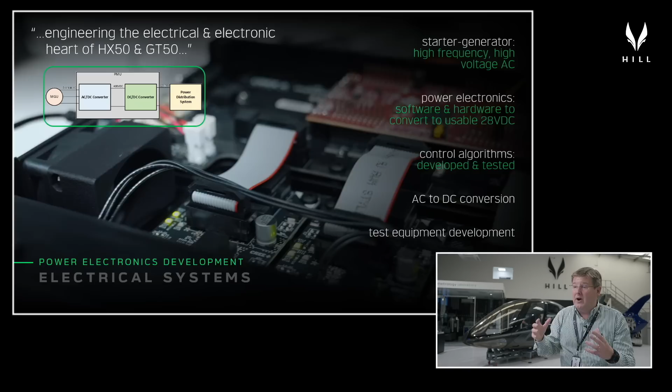And one of the things that Zhenyu has been leading is developing what we call our power management unit. And that's the unit that does all of those things. He's developed the control algorithms, he's currently developing the AC to DC conversion, and then we'll do the DC to DC voltage conversion as the last step in that. And to do all of that, not only have we had to develop all of the equipment to do it, we've also had to develop the test facilities to be able to test the components as we produce them.

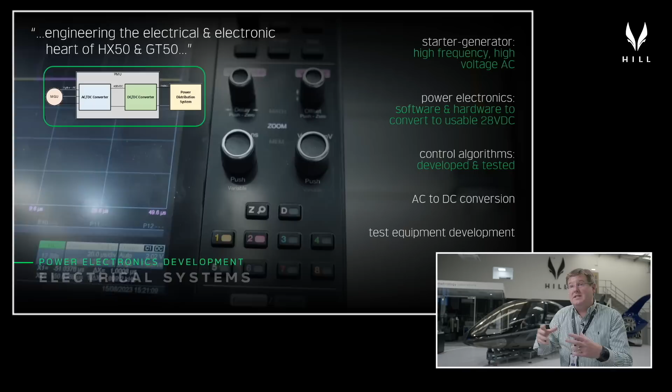And what we've got over there on the electrical test bench, which I'll show you in a second, is the facilities that allow us to drive and test the starter motor, drive and test the generator, and then downscale the power electronics to something ultra light and compact to actually go onto the aircraft. So let's go over and have a quick look at the electrical test bench.

So I know you're all very used to me talking about composites and gears and engines and aerodynamics and that sort of stuff. The truth is that without all of the software and without all of the electronic and electrical components, HX50 would just be an ornament. And so although this stuff is not natural stomping ground for aeronautical engineers, it's really, really important to what we're doing.

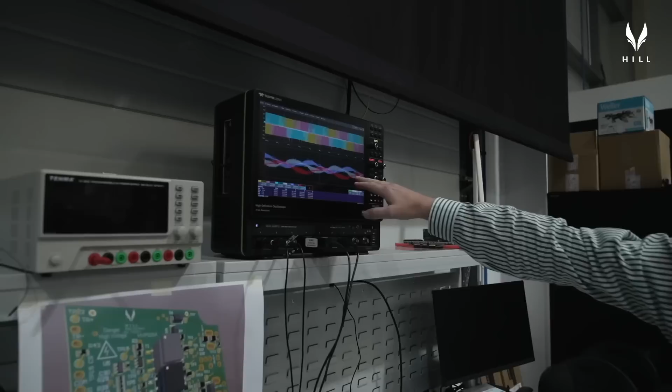So what we've got here is essentially a bunch of mathematical formulas that chop up this three-phase high-frequency signal that the generator produces when it's running, and then process that into usable electricity. Now what we've got here is our control algorithms developed right here at Hill, embedded on an off-the-shelf power converter.

So this is just a bigger industrial version of what we need to put on the aircraft to run the starter generator. So our algorithms are now working and delivering the levels of power conditioning that we require. And what Zhenyu's focused on at the moment is developing the PCBs to miniaturize all of this and get the weight and the size down, the efficiency up, so that we can package that on the aircraft.

And what we can do with all of these facilities here, this unit itself with all of the control algorithms is able to drive that first starter generator when we produce it. So this will allow us to drive the starter generator to start the test engine, and then this will also allow us to run the generator with the engine and generate electricity.

So all of that stuff is now here in place, and the final piece of the puzzle that you can just see down here is the power source and then the load bank that we need to receive all of the power that's generated by the starter generator while we're testing and developing it. So all of these things have been implemented over the course of the last month.

You've seen us develop the avionics test bench. Now we've got the power electronics and the electrical test bench to bring those parts of the electrical system together to make this aircraft fly. Let's go back.

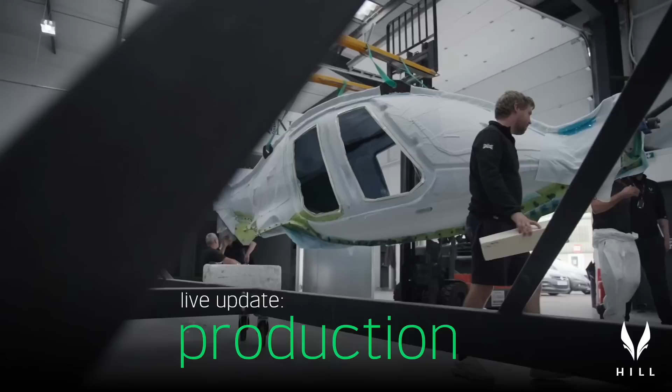So one of the last things to update you on then from around the company is just a quick update on what we've been producing around the business over the course of the last month or so. So as we've talked about, we've got Fuselage 6 in production, which is the wheeled demonstrator we're intending to show at the end of the year. Fuselage 7 will be following that shortly.

We've now produced both of the tail booms. The A-surface tools have all been produced for the 4 cabin doors and the 2 baggage bay doors. The cover for the top of the tail boom has been produced along with the cowling panels, which just leaves us with the upper fuselage and the latest generation of the seat tools to produce in there.

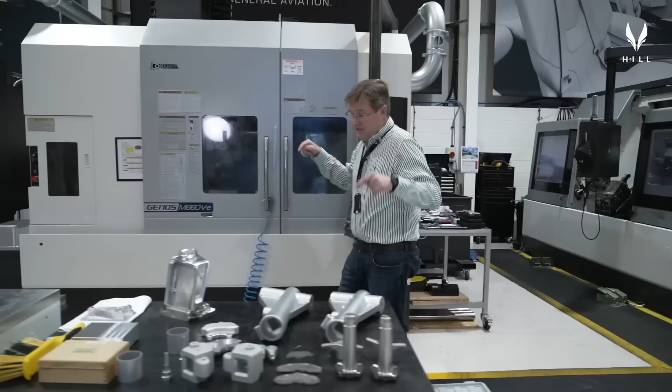On top of that, we've also been busy here at DC1. There's been plenty of gear production, as you'd be aware, lots of turbine components starting to come together. But one of the things that you won't have seen very much of yet is we're now starting to amass quite a significant number of components for the wheeled undercarriage system.

So we've got some of the mounting components, we've got the brake calipers, we've got the upper parts of the main undercarriage oleos, we've got the fork here for the nose wheel, we've got some stub axles over there, we've got plenty of anti-rotation links and scissor links and things lying around now as well. So all of these things are coming together really nicely.

We've got a bunch of internal components for oleos and pivots and things here. The majority of these things are built by us. There is some stuff that we're doing outside at the moment just to speed the process up.

When I spoke to you earlier about the drivetrain components that we're producing, to give you the sort of scale of manufacturing that's going on here in terms of precision components, this is a batch of gears for the first 3 engine drivetrains and some of the components of the main rotor gearbox that have just come back from some of the inspection processes that are required as part of our 30-step process for manufacturing gears.

So this stuff I think has just come back from NDT and is now ready to be finish machined, ready to be made up into the first 3 engine drivetrains. And the intention is that the third one of those will be the flight drivetrain.

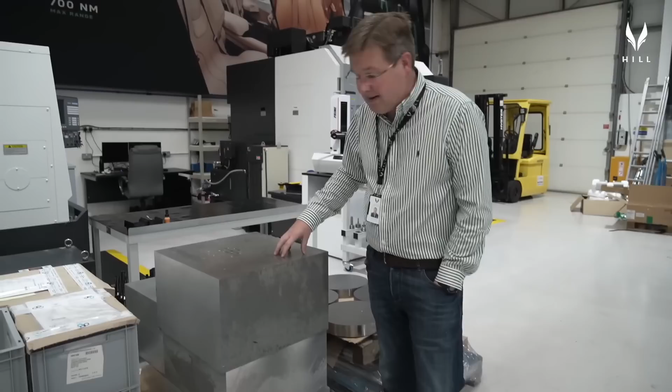This, believe it or not, is how prototype main rotor gearboxes start life. So we've just had this stock delivered, ready to make 3 more sets of main rotor gearbox casings. In production, we'll be casting these, but for the early functional demonstrators, for the early test articles where we're testing lubrication, run dry, it's just convenient for us to be able to manufacture those from solid because we can do it a lot quicker.

We've just taken a delivery of a bunch more material for some of the bigger gears in the engine, and there's the stock material for 3 more rotor masts down there as well. And over the course of the last couple of weeks, we've been producing the first set of wheels for the HX50.

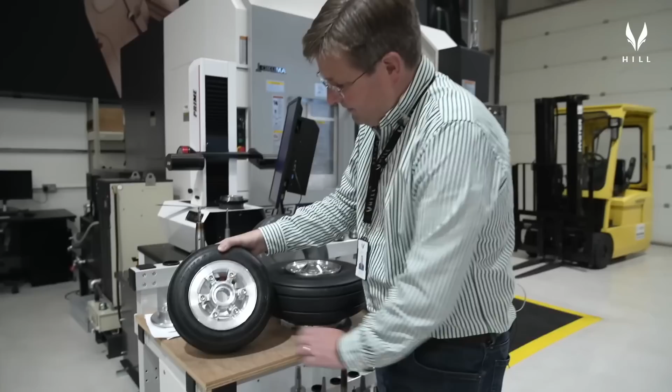So there's the first nose wheel, and the first main wheel with a nice bit of hub bling in the center of it. And with these main wheels, on the back of them, we have to have a floating integrated brake disc as well. So the brake disc lives in there, the caliper is retained in there.

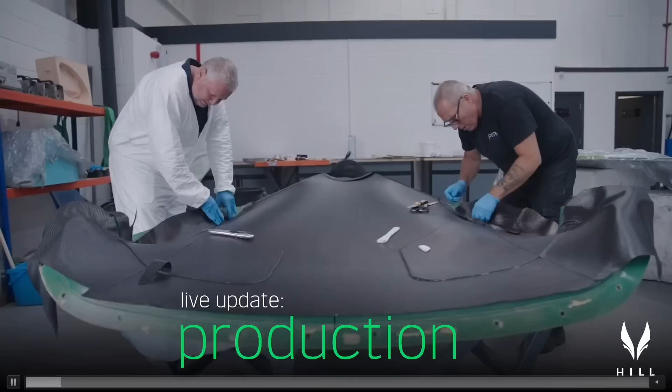And then we've got some of the anti-rotation and scissor links and things that we've been building there as well. So what's your update, Josh? From across the program, both DC2, DC3, and right here at DC1, everybody's flat out producing the components to get these first demonstration aircraft together. So really pleased with progress from across the program.

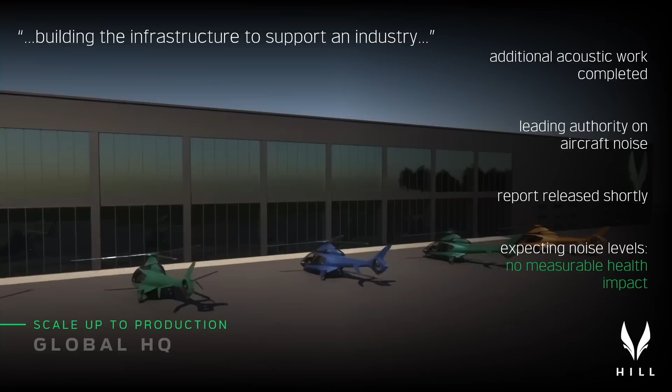Okay, a quick update then in terms of the factory. As I reported last month, we'd been asked to do some additional noise assessments for the Cresswell site. This work has now been completed. We've been using one of the UK's leading authorities on aircraft noise, a guy that looks after a lot of the big airports in the country. We've optimized our flight corridors, we've optimized our aircraft movements, and we're expecting the noise levels from that work to show that all of the impact is now below the level for which there's any measurable impact on human health. So we've put ourselves in the best possible position to get this planning permission awarded. Pleased with the progress on that front.

And in other news, it's been another strong month in terms of sales. We currently stand at 902 aircraft sales, with 733 X's, 169 C's, across I think 62 countries. Ruben and Misha will update me when we talk in a moment. But sales remain extremely strong, and of course, every week when we demonstrate further progress and more major steps in the program, it brings more people in. So there's never been a better time to come and join what we're doing here to General Aviation.

So thank you very much for your time and attention, and I'd be happy to answer any of your questions. Thank you.

Wow, what a phenomenal update, Jason. And what is incredible about these updates, Misha, is that it's really exponential, the rate of development that we're witnessing actually in real time. And this is something special about Hill that is unique, that we update almost every single month. These updates have been happening now, more than 20 of them, and it has been phenomenal to follow the journey as it's happening.

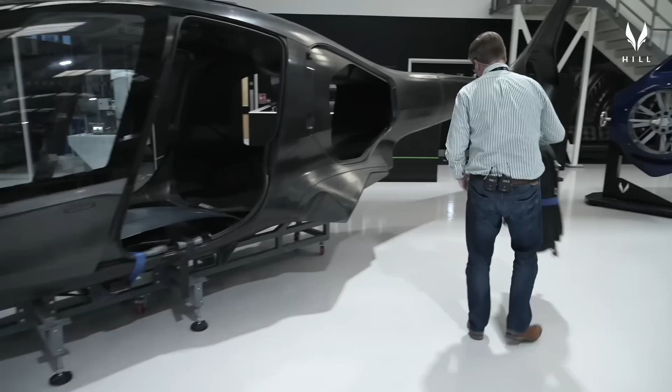So I've literally just stolen these bags from some visitors we have in the meeting room. That's a full size suitcase, and it goes in really comfortably. You've got 1, 2, 3 very comfortably, and remember that the baggage bay, if you stick your camera in there, Milan, goes all the way up to the boundary where the tail boom meets the end of the fuselage. Obviously you can't put really heavy stuff up the back because it'd cause a CG problem, but for long things like golf clubs, skis, surfboards, you can use that area. So it's a very big baggage bay, bigger than most light helicopters you might be used to flying or operating.

Okay, good, excellent. Jason, as we get closer to the delivery, this is a question that is coming up quite frequently: will there be a finance package available at some point? What are the plans in that area? Yeah, there will definitely be a finance package.

We have spoken to UK-based finance houses, and they're more than happy to work with us. The challenge while we're in the development phase is they're not interested until there's an asset to finance, so they need a physical asset on the ground. So I think we need to get the first few machines into the air, approved and flying, and then there'll be a wide range of people in all territories around the world more than happy to finance these things. It's another one of the enabling solutions we need in place to allow people to buy these. We're looking at a range of options that include wrapping up a finance payment, an insurance payment, and your maintenance coverage within a single monthly payment, but none of that can really be developed until we're in production. So yeah, we're absolutely all over that. It's really important to us going forward, but some of these things just have to be done in sequence.